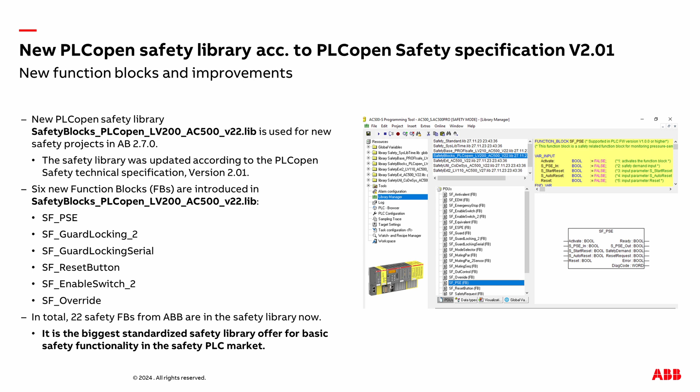Now a few words on compatibility, because we had since launch of the product this PLC Open Safety Library version 1.0, and it's still valid. It can still be used in projects, and it's offered in Automation Builder profiles smaller than 2.7. If you have an existing project and you would like to migrate it to Automation Builder 2.7, we keep this library in the project so that you can keep the possibility to compile your project without any warnings or errors because of new inputs or outputs of new function blocks. So if you would like to migrate from version 1 of PLC Open Safety Library to version 2 PLC Open Safety Library, you have to do it manually if you have created projects with Automation Builder smaller than 2.7.

And of course, if you create a completely new project in Automation Builder 2.7, then the new library will be used, which I showed in the previous slide. So probably one question is why the new library, when you include it, doesn't compile: because PLCopen Safety decided to limit compatibility to version 1.0, for example, by introducing in some function blocks additional outputs. You see them named here, safety demand and reset request as examples. You can see them on the next slide also in more detail.

So for example, this function block override has safety demand and a reset request, and a few even existing function blocks have these outputs added. So it requires, of course, adapting your safety application if you would like to migrate to version 2. And for that purpose, we said, okay, we offer to you this other library. You see there is an addition ext at the end. There is a link how to download it from ABB library.

And this library includes only 6 new PLCopen Safety function blocks, exactly these ones, which are listed here. And you could add them to your existing application with PLCopen Safety Library version 1.0. With that, you can keep your existing safety application unchanged without any adaptations, and you can still use even new function blocks from version 2 in that application. So again, it gives you flexibility to decide what you would like to do.

And on top of that, we also have a PLCopen Safety Library version 1.0.1, where some internal improvements were done for this function block SF_MutingPar. And this improvement is included, so we recommend, of course, if you would like to stay with version 1 specification of PLCopen Safety, to change to this library version.

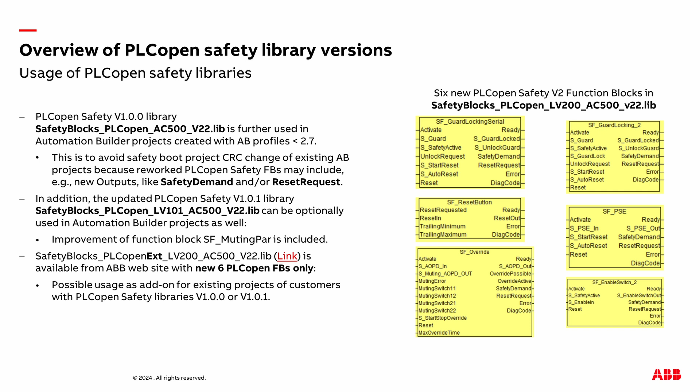And this library version is fully compatible in inputs and outputs with the other library. But of course, if you compile it, then you'll still get a new boot project CRC for that. So you have to do some verification and validation procedures on top of that to be able to use your safety application as before. But other than that, this library is absolutely compatible with the previous one.

Now we're coming back to the PLCopen Safety version 2 library. And I would like to highlight, as I already mentioned on the previous slide, these new outputs. They are used in almost all safety function blocks, even ones not shown here. You remember there were 22 of them. And the main purpose of that is to give you better visibility in your safety application. What is the current state of your function block?

So for example, this safety demand output, you'll see it also in the demonstration later on, shows you that the safety function is currently activated and there is a safety demand, then it's true. And if there is no safety demand, then it's false. The reset request output is also very good because in many function blocks, typically when you have some activities with these function blocks, you have to reset them. And that's why the reset input is quite prominent.

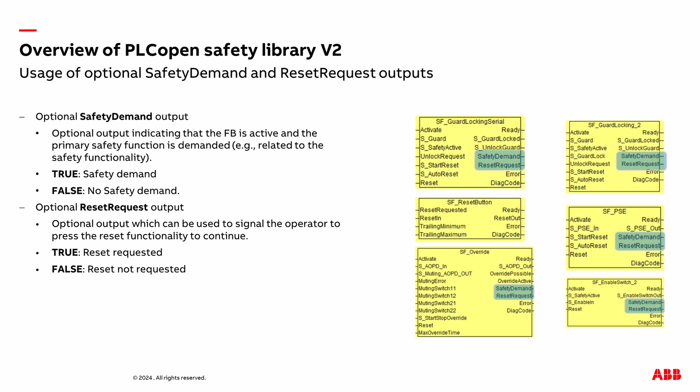And it's really good to have it also at an output, to know that you have to press your reset button. That's what we will also do today. And then reset the state of the function block and keep going with your safety functionality. So again, true indicates the reset is requested, false, reset is not requested. Now we'll come to the explanation of each of these safety function blocks. I will cover 4 out of 6 because 2 of them are quite complex to explain in this webinar. So please refer to our safety user manual for more explanations. But I will focus on the first 4.

And the first one, which was introduced in our library, is called SF reset button. This is a very useful function block because it allows you to set the trailing time, the minimum and the maximum time expected for the reset. So you are able to set timing constraints on reset behavior, which is required by the ISO 13849 standard, the functional safety standard for machinery applications. It's also referenced in the Machinery Directive and Machinery Regulation, at least in the European Union.

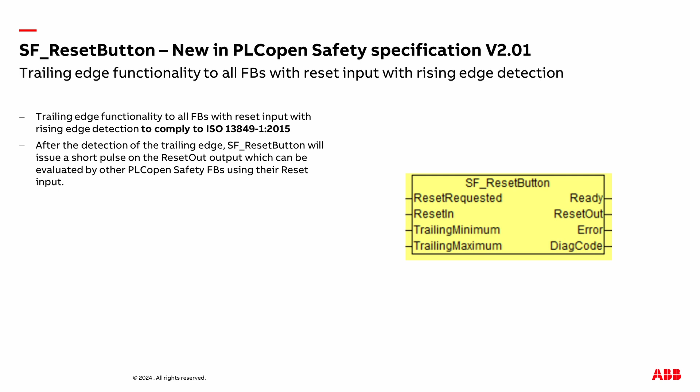And you have to supervise how the reset button is working, because the reset button can also get broken and then the contact doesn't respond in the expected timing intervals. And this is not good for safety applications because it creates some undeterministic state. And the reset button function block helps to solve that. How it can be used, you see here on the next slide in a good example.

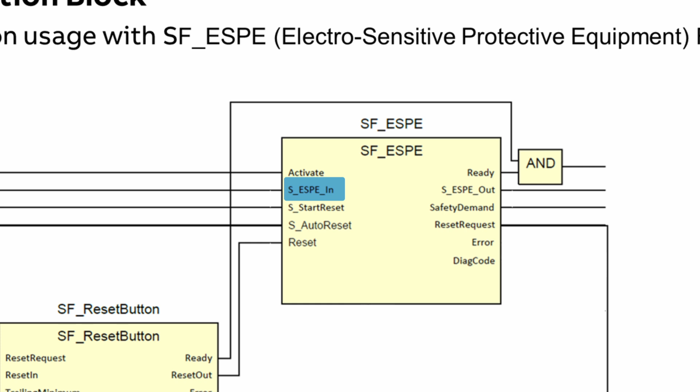So it can be used just before our electrosensitive protective equipment. In this case, it's a light curtain, but it could also be some other device. So this S_ESPE_In input is usually connected to the output of the light curtain. But then when something happens, you may need a reset of this function block.

And to reset it, you don't connect the reset button input directly to the reset, but pass it through this reset button function block, which defines the minimum trailing time and maximum trailing time when the reset button is triggered. And only then it is accepted as a valid signal and then connected here to the reset output and resets the light curtain so that you can continue to use it as safety protective equipment.

So very useful functionality. Up to now, customers had to create it themselves, or some customers did, depending on their requirements. Now you have a standard function block, which is standardized and tested, verified, validated, and approved for safety applications with AC500S.

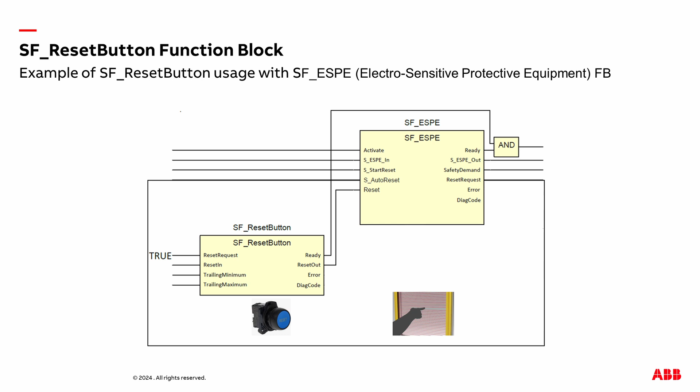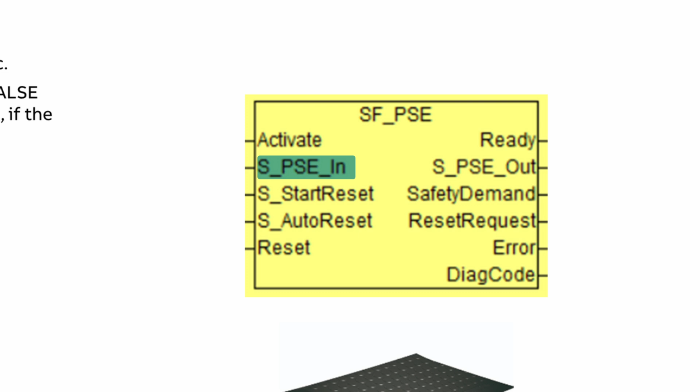The next function block, which is also very helpful, is the monitoring pressure sensitive equipment. It's a PSE function block, which can be used with safety mats, with bumpers, basically devices detecting mechanical contact. And when it's triggered with the S_PSE_IN input, and depending, of course, on the settings on start reset, auto reset, you can generate the output to let the machine run, or depending on the status of the safety protective equipment, also stop the machine.

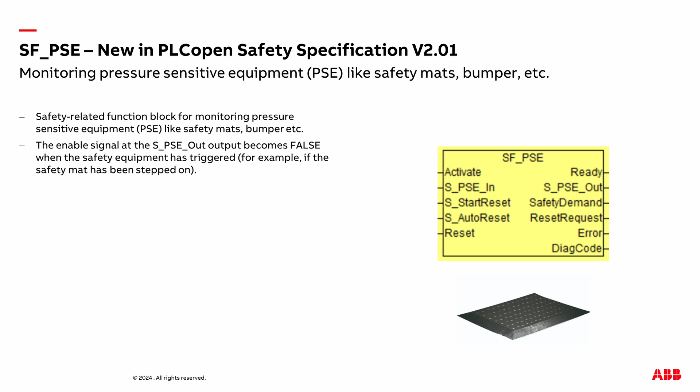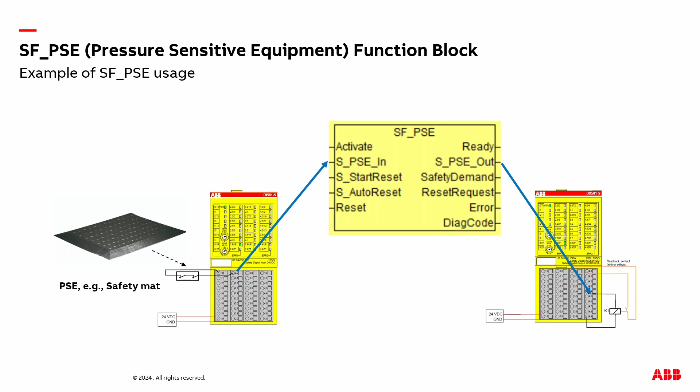And then again, depending on the status of activate, reset, and the others, if you configure this correctly, you can control, for example, the safety output of our DX581S module, and then trigger, for example, a contactor or safety relay. Could be two contactors depending on the safety level or performance level you would like to reach in your safety application. So again, very useful function block. Before that, customers had to do their own solution or use other function blocks in combination to reach the same functionality.

The third function block which I would like to show you is Enable Switch 2. It's again a new one. It enables you to evaluate not only 3 position enable switch devices, but also 2 position. And when we talk about 2 position, it means it doesn't do any detection of panic position. So usually in these safety related enable devices, if someone gets scared, it's expected that he's not able to keep a valid position. For example, it could be a joystick, so he has to put it on the left side or on the right side. And the middle position, for example, means that he is not active and the safety function has to be triggered.

So the enable switch function block could handle that, but if you don't need this panic position, so the third position is not needed, then you would have to work around something in your safety application. Now with this function block, you can cover also 2 position. And in this case, I showed here 2 push buttons, because you don't have any panic supervision. Thus, it doesn't have to be a joystick or some other special safety device. You can just use standard switch devices with, for example, 2 positions. But still, depending on the configuration, you can also use a 3 position switch.

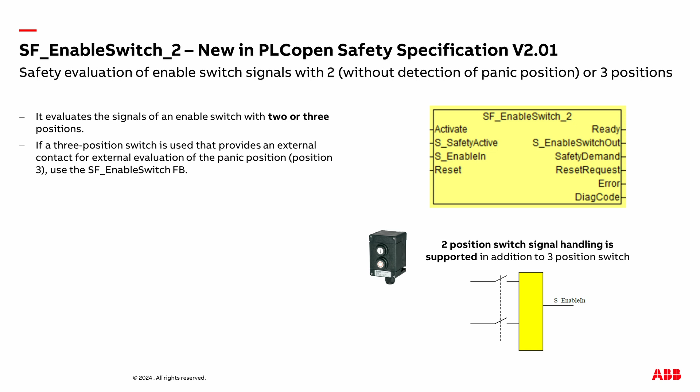The next one is the override. The override function block enables you to move a product in the production line even when the muting functionality was aborted. So imagine you have a machine and a conveyor, and for example, these pallets are transported inside this machine for a cutting operation, and something happened and you're not able to push the products further, and you have the situation under control. You would like to clean this area for whatever purposes, and with the override function block you can do this.

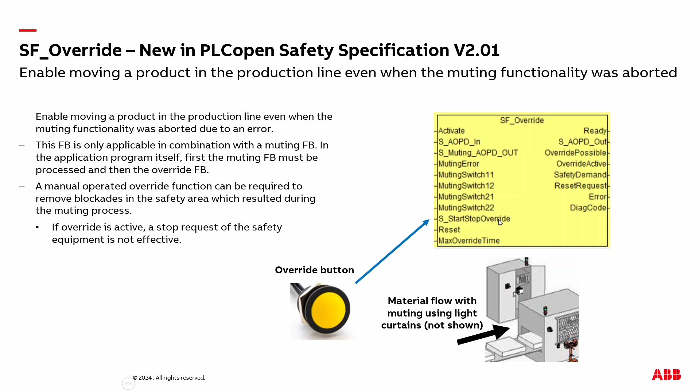And independent of the state of the muting sensors, which are usually positioned here, they are not shown, as the light curtain is also not shown, which is usually positioned here. You have also muting switches for detection of the products, so you can override them. You do this by connecting this override push button to the S_start stop override input. Other inputs have to be properly connected, of course, and then you can use this function block in the application.

So the fifth one is Guard Locking 2. It allows you to have safe control of access to the hazardous area. I will not go deeper into this function block because it's basically supervising a sequence for an entry into a safety area, for example, a robot cell or some production part of the machine, and expects from you a certain sequence of events. So you see, you have to connect your guard. The guard could be a door access switch. You can lock this door depending on the lock state so that the machine can keep production.

Before you can use this S_guard input, you have to unlock it first and then come in. And usually most of the signals are implemented either in a set of position switches or even inside of one device which has a handle. It has these lock buttons and so on, and the operator has to know it, and only if he's doing all these operations in a certain sequence he gets control and enters this area.

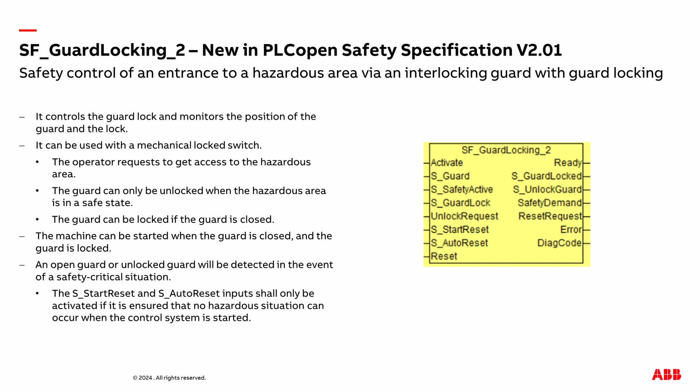So the guard locking 2 introduces one more approach in addition to the previous function block which we had in the PLCopen Safety version 1 library, and covers also this special case. For more details, I would recommend going to the AC500-S safety user manual because there are many special details on that.

A similar comment I would like to make also for guard locking serial. This is usually done when you have a serial connection of locking devices. Again, you can unlock this device, you have again S_guard, and there is again a supervision for the sequence, how you can unlock these special devices, which are specified by safety standards.

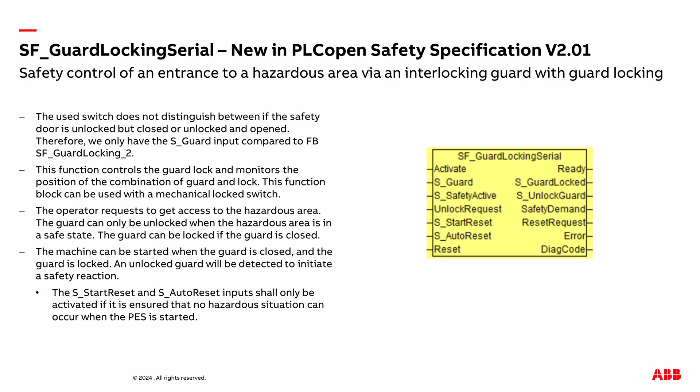So if you look in the AC500-S Safety User Manual, you'll quite often see that most of this functionality is also specified in relevant safety standards. And these function blocks just cover these functional requirements for particular applications in a certain way. With that, we've now covered the six function blocks, some of them with more detail, some of them with less.

Now we'll come to the safety application as an example of how we could use some of these safety function blocks from PLCopen Safety version 2. And the purpose of this application is to show you why, for example, safety outputs like safety demand and reset request are so helpful in the application and give you a little bit of a feeling for how this safety functionality works and behaves. So what do we have here?

We have a small cutting machine, where these pallets are fed in here. And after this cutting process, they are cut in pieces. You see they come out as 6 pieces after the cutting operation and go to the next machine, for example, for labeling or for packaging. We'll cover only the cutting machine part here.

What we'll need is a two-hand control device. For that, we used this product which ABB has in its electrification portfolio. And you see the left hand is put here, the right hand is here, and then you have your emergency stop button here to stop the operation in case of emergency.

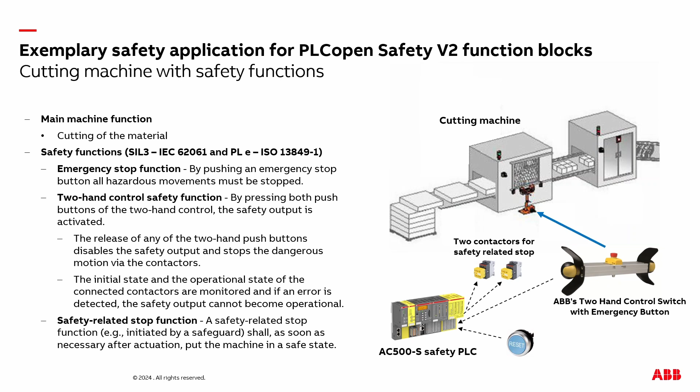And then we have, of course, a safety-related stop. If you remove your hands, then these contactors are triggered and they de-energize the motor. We don't cover here safety function response time and other things, for simplicity. In the end, the overall application is, of course, much more complex. So we focus only on handling the logic behind these devices connected to these machines. And I will also demonstrate this application using a live demonstration.

So here, the next level of explanation: what do we connect where? First, we have the emergency stop function block for emergency stop button handling. This is what I mentioned, and this is part of our PLCopen Safety function blocks. This function block was already in version 1. So in version 2, if you compare, you'll see that the safety demand and reset request were added. Other than that, the functionality inside is very similar to what you had before.

All of the outputs are connected to some variables. Here, for simplicity, I put some constants as inputs. Normally, you would also put some variables here. The second function block is a two-hand control, and this is what you see here. So these two

position switches, which can be triggered, or push buttons, are connected, switch 1 to this one and switch 2 to this one, to another function block, which again handles the logic behind, so that the output is triggered only if a valid state for these switches is observed, also in the sequence in relation, for example, to the process input and so on. That's something I will demonstrate in the live session in a second.

Then we have the reset button. Yeah, first we have our contactors, of course, to control contactor outputs. We use the EDM function block so that we can trigger the contactors and then also read back their states directly. Usually they have forcibly guided contacts for readback, which allows them to be used in safety applications. So they provide us the feedback whether they are triggered or not.

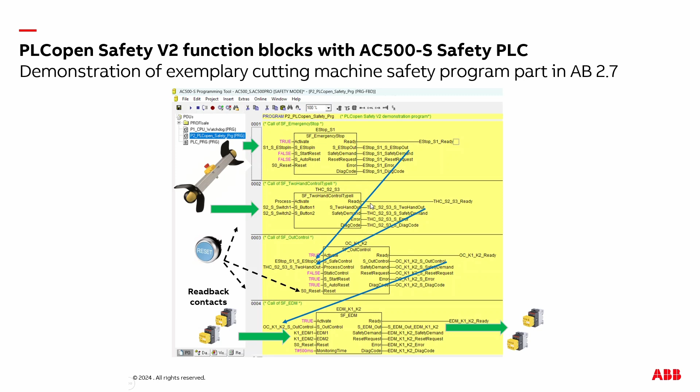And when the machine is stopped, for whatever reason, either because of two-hand control or because of emergency stop, then you will need this reset button, and it is connected here to these S0 reset inputs. This one doesn't need reset. That's why you don't have the input here. But again, here reset and here reset. And of course, you can have multiple reset buttons depending on the application. In this case, we used one reset button to reset everything. Short explanation of what you will see, and now we go to the live session.

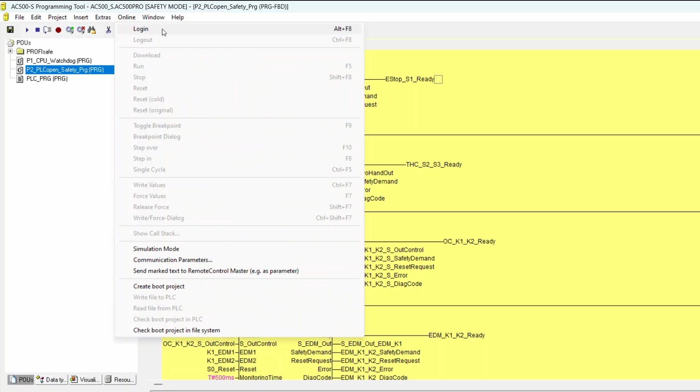So I'm here with my safety project in the AC500-S safety programming tool. I have my application running. I also have my simulation system here, and this is the initial state of my machine at the moment. What you can see here is that my safety output is still off initially. For your information, if you have the blue color, the state is true. If you have the black color of the output, the state is off and false. So you see that the emergency button, for example, is not triggered, so it's active.

And what you can see already here, this is again a very good benefit. You can read today with version 2 directly that before the output of the emergency stop gets active, which is at least one precondition for the machine to get running, first you have to reset it. And that's what I'm going to do. So I have my switch, a push button, here on the table, you'll see that I reset it, and reset was triggered here.

For simplicity, I didn't use this reset function block, which I showed before. So I'm focusing just on these 4 function blocks. You could also use an intermediate function block for this reset button, with the reset and this minimum trailing and maximum trailing. Here, for simplicity, I skipped this stage.

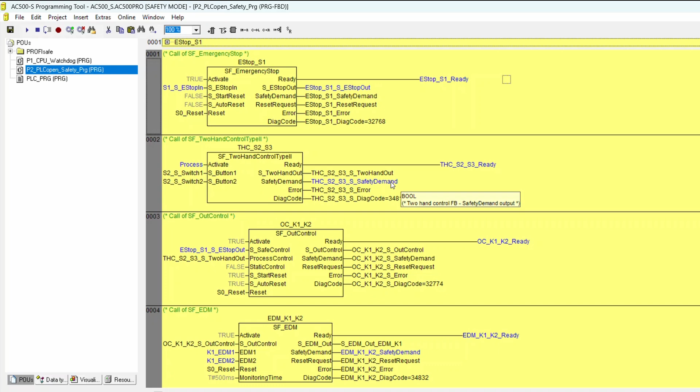And with the process activated, you see directly that the safety demand output is set. It means, okay, please press these 2 push buttons so that I allow you to get the true value here on the output, and the precondition for activating the machine is there from the safety point of view, and it can start running.

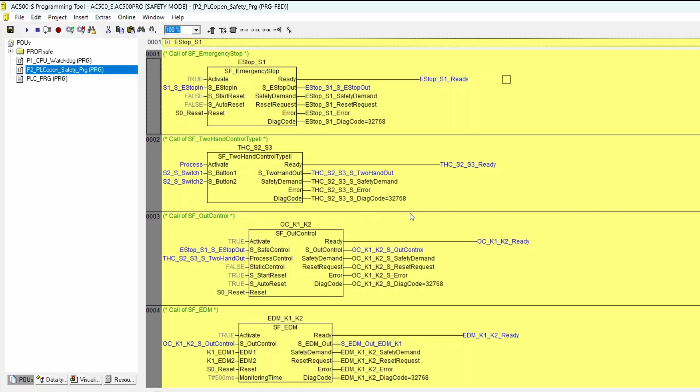But for that, I have to press these 2 switches, switch 1, switch 2, and that's what I'm going to do. So first one, second one. And what you see, as soon as I pressed both switches together, so currently I'm holding both of them, virtually I'm simulating, of course, here, the two-hand control output is activated.

So we have 2 preconditions for our out control. Both are active, and now the output is also active. It's propagated to the EDM function block, which activates both contactors. And you see that the readback is also in the right status. It's currently off because only if I switch off here the outputs and the contactors are de-energized, then the readback contacts get positive. So it's de-energized to trip state.

So currently the machine is up and running. Everything is fine. And what I will do now is I press my emergency stop button. I have a real one here, so I'm pressing. So what happened? You see that the emergency stop input from my emergency stop button went to off. The output of the function block again is de-energized now. Because of that, of course, the out control also is de-energized, and it propagated to the EDM.

So now the output is off. Both contactors are de-energized, and that's why their readback contacts are active. So I can supervise that the state is safe for the machine and it's not running. And the good thing here, again, now for emergency stop button, you see, okay, to restart the machine back, I have to take back my emergency stop state, and then the machine can run. So that's what I'll do in parallel here.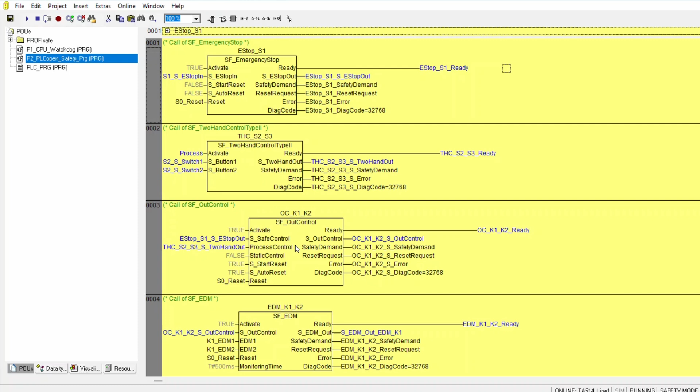So if you would go to another brand, there are some other function blocks for similar functionality. They look different, they have different outputs, different inputs, different naming. You can get completely confused, and it's really from brand to brand. Here with PLCopen Safety, all these typical functions in the machines can be standardized. You can have a common look and feel between different PLC brands, and this is a big benefit. So now I would like to log out here and go back to the presentation.

Now the final slide, the summary. So we've launched PLCopen Safety Library version 2 in Automation Builder 2.7. We have now 22, you see here the list of these function blocks, which you can connect together and implement all kinds of safety functions, especially in simple OEM machines. We have the biggest offer at the moment, together with 1 or 2 other companies. I think that others will follow, of course, because the specification is there.

And with that, you have a common look and feel. The customer investment in these safety applications is protected. He has much more freedom later on with these applications if he decides to change the vendor or would like to do some modifications in the program. He can be fast in his application development because we have very detailed, good documentation, explanation, and specification if you look in our safety user manual. And we think that he can be much more flexible in the engineering.

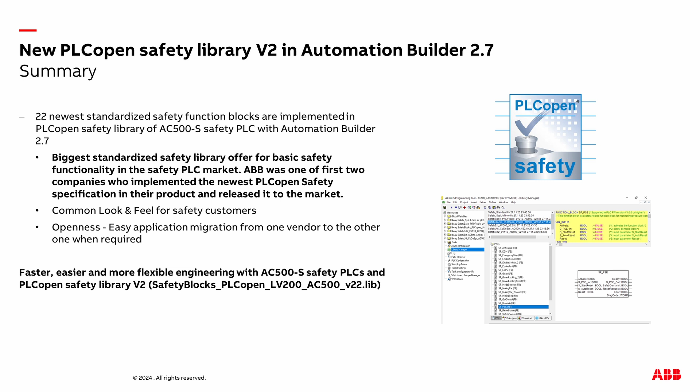And today we've seen also the benefits of our version 2 library, 6 new function blocks, and also additions with safety demand and reset request, and how useful they are in safety application based on a very small example of a metal cutting machine.